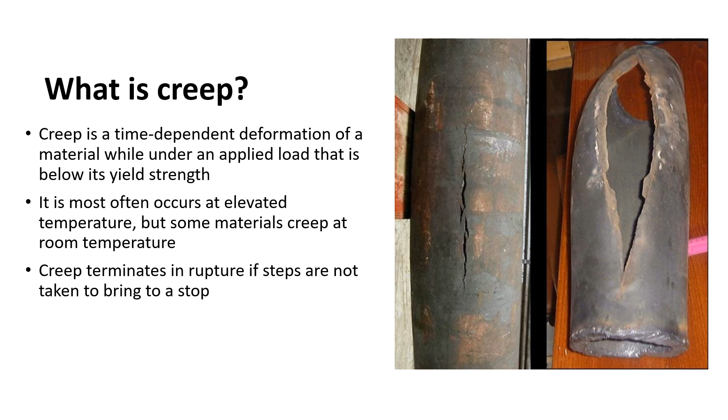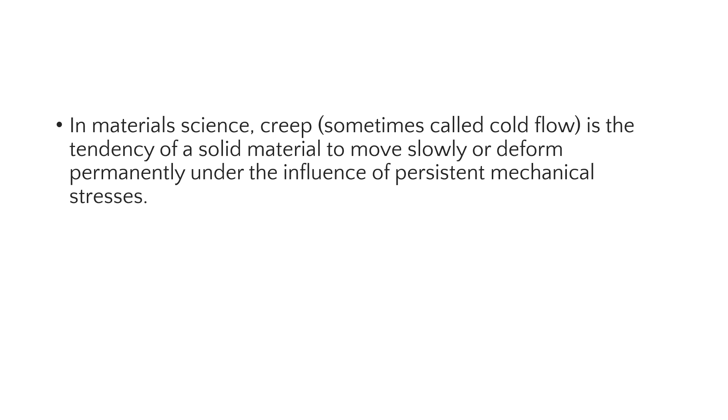Diffusion, dislocation glide or climb, or grain boundary sliding all can contribute to the creep of a metallic material. It can occur as a result of long-term exposure to high levels of stress that are still below the yield strength of the material. Creep is more severe in materials that are subjected to heat for a long period and generally increases as they near their melting point.

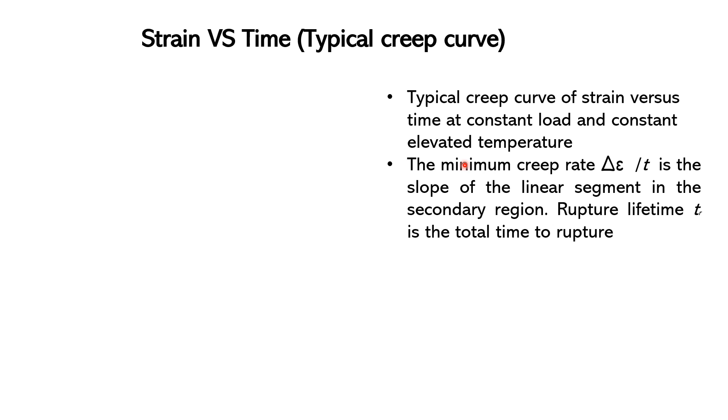The rate of deformation is called the creep rate. It is the slope of the line in a creep strain versus time curve as shown in the figure here. The result of a creep test is usually plotted as a creep curve where we plot strain as a function of time because we are keeping the stress constant. Unlike the stress-strain diagram, we have a strain versus time diagram because it is a continuous plastic deformation as a function of time.

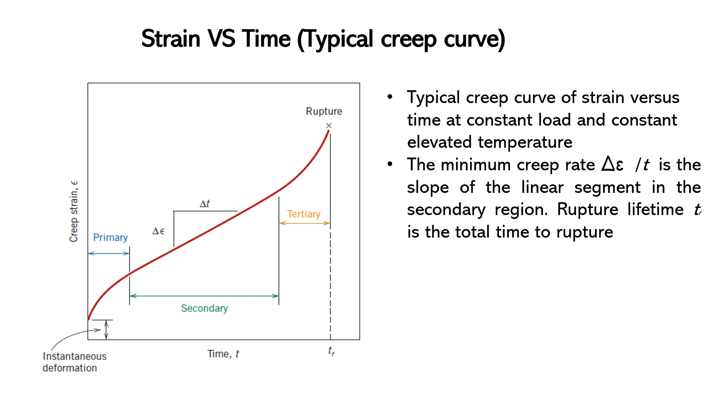So in short, strain is plotted as a function of time, as you can see in the graph here. Creep is a time-dependent permanent plastic deformation that generally occurs at a high temperature under a constant loading or stress. It can also occur at room temperature for soft metals such as lead. Creep is a slow process where deformation changes over time.

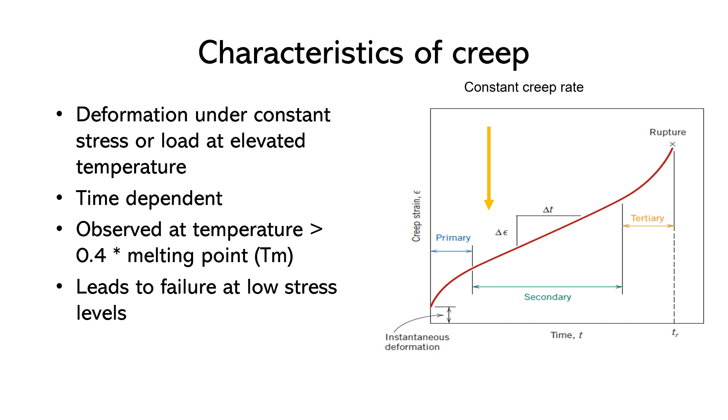Creep is very important in applications such as turbine blades in jet engines, gas turbines, and power plants, including boilers and steam lines, where these components must operate at high stresses and high temperature without any changes in dimension.

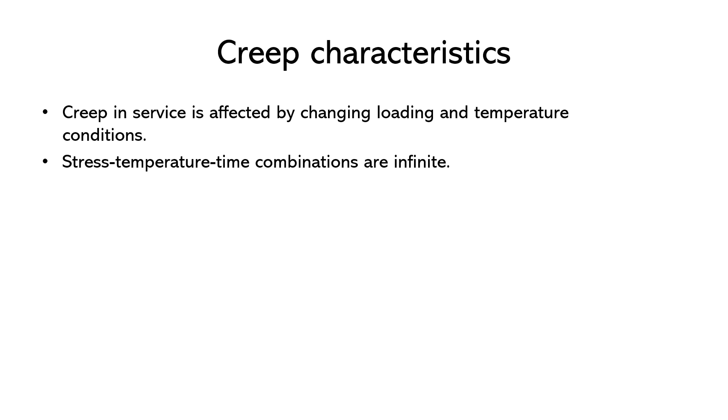So now we will be talking about some of the characteristics of creep. Creep in service is usually affected by changing conditions of loading and temperature. The number of possible stress-temperature-time combinations is infinite. Creep mechanisms often differ between materials such as metals, plastic, rubber, and concrete.

And also creep is a time-dependent deformation under an applied loading. Metals and alloys do not exhibit time-dependent deformation under normal service conditions. Metals subjected to a constant loading at elevated temperature will undergo a time-dependent increase in length.